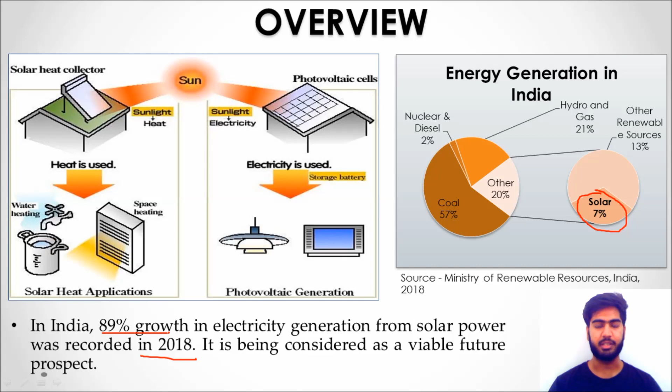Now, if we talk about India, then 7% of the total energy generation in India is from solar radiation. And in 2018, 89% growth has been seen in this sector. So this is a promising sign. Now let's talk more about the methods that are available. So in PV cells, basically the sunlight falls on the flat surface and with the help of semiconductors and transistors

is directly converted into electricity. Now the second method is solar thermal technology, in which with the help of mirrors the radiation from the sun is concentrated onto a pipe in which fluid is flowing. So that fluid is heated and stored in a storage system, and then it is used for running a turbine to generate electricity. Now this PV cell has only 20% capturing efficiency and 45% conversion efficiency,

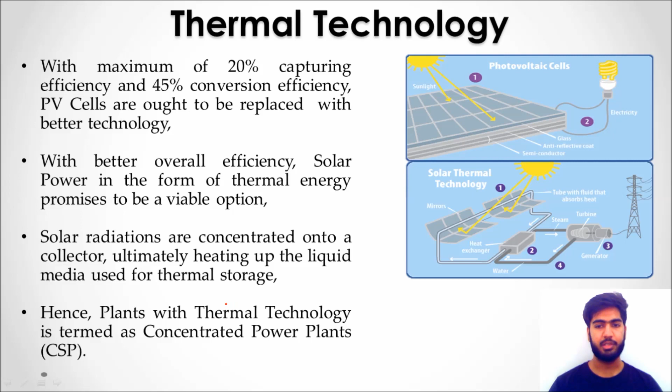which is very low to use in power plants. Therefore, solar thermal technology is used, and also the major factor is that PV cells don't work at night, whereas solar thermal technology stores the heat. Therefore, it can be used to generate electricity at night. Also, as the radiation is concentrated onto the fluid, the plants which use solar thermal technology are also known as concentrated power plants.

Now, in most of the power plants that use solar power, there are two general methods of concentrating the solar radiation. The first one is the parabolic method, in which mirrors are shaped in the form of a parabola, and the pipe which contains fluid is placed at the center of this parabola. Therefore, the radiation is concentrated onto this pipe and the fluid is heated.

Whereas the second method is the power tower method, in which flat surface mirrors are placed around the tower in such a way that they concentrate the solar radiation onto the top of this tower in which fluid is stored. As flat surface mirrors are cheap, this method is cheaper than the parabolic method, but the parabolic method provides an efficient way of heating. Therefore this method is used.

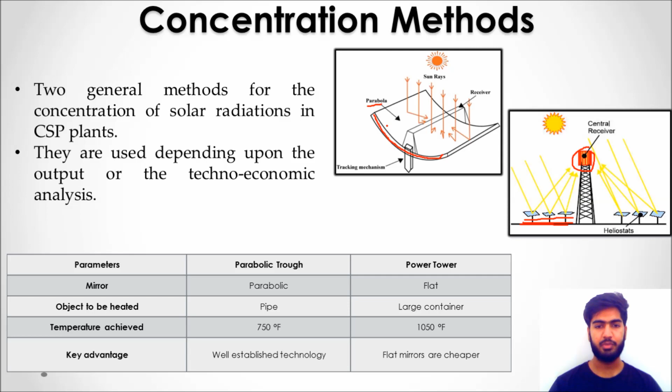So after the fluid has been heated, it has to be stored, and there are three ways to store the heat. The first method is thermochemical energy, in which the collected heat is used to start an endothermic reaction, and that heat is stored as chemical potential. Now, whenever heat is required at night or whenever there is a power shortage, exothermic reactions are started and heat can be recovered by that.

Now, the second method is the latent heat method, in which phase changing materials are used and they absorb the collected heat when they change their phase. Whenever heat is required, it can be recovered from these materials. Now, the third and most used method is the sensible heat method, in which materials are heated and their sensible heat energy is increased. So whenever extra energy is required, this heat can be recovered from them.

This method is really cost effective, and the materials that are used in the latent heat and thermochemical methods are really toxic and flammable. Therefore, it is better and safer to use the sensible heat method.

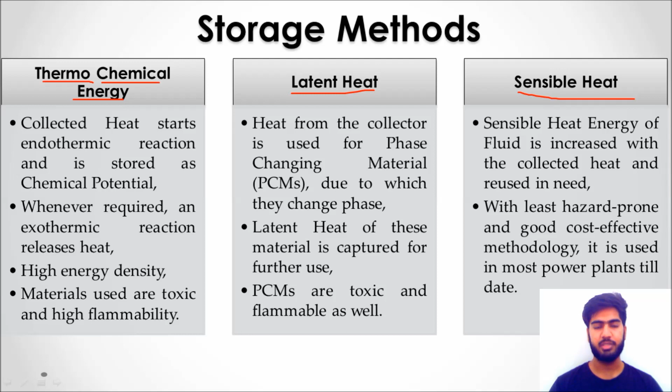As we have seen the methods to concentrate the radiations, now there are two systems generally used in power plants to store this thermal energy. So the first one is single tank storage method, and the second one is two tank storage method. So the single tank storage method uses a single tank to store hot and cold fluid both, whereas the two tank storage method stores hot fluid and cold fluid separately.

As clear from the mechanism itself, the single storage method uses less heat transfer fluid as well as is cost effective, as there is only one tank stored and it is simple in its mechanism. Two tank storage method was used extensively in the last decade, whereas now the single tank storage method has been given emphasis and is being analyzed extensively.

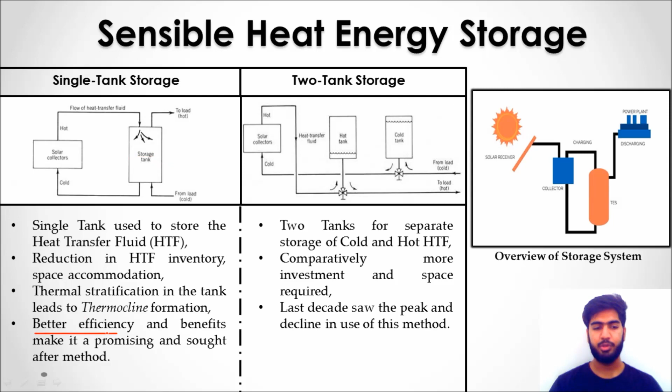Also, due to the storage of hot and cold fluid in the same tank, there is a thermal stratification that is formed in between them, and it is also known as thermocline. Also, due to its better efficiency, it is a most sought after method in power plants. Now, let's talk more about the single tank method.

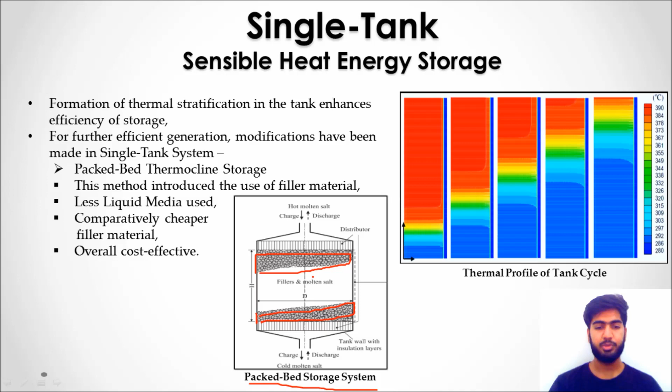Now due to this method, there has been decrease in the heat transfer fluid as well as the ability to store heat for a longer time has been seen. So this has been a cost effective method. Now let's talk about the parameters that affect the single tank storage efficiency.

So according to various modeling and analysis, the first parameter that has significant effect on the efficiency of single tank storage method is the tank dimensions. So various research has led to this theory that with increase in the height of this tank, the overall efficiency of the system will increase. Whereas an indirect relation between the diameter and the efficiency suggests that when diameter is increased, the filtration rate is reduced, which ultimately leads to increase in the efficiency of the system.

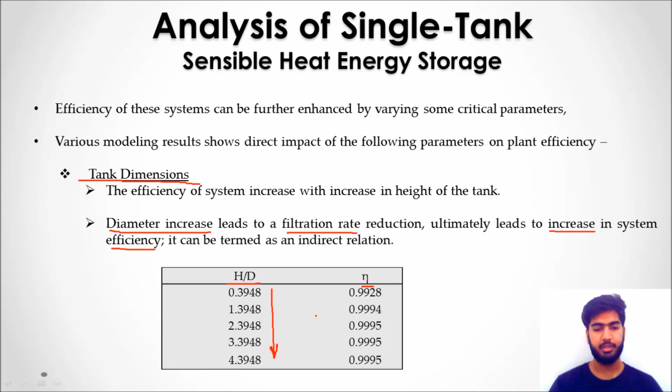Now this table shows the effect of height to diameter ratio on the efficiency of the system. It's clear from this table that when the height increases with respect to the diameter, the efficiency also increases. The second parameter would be filler materials.

As we have talked in the packed bed storage method, filler materials play a significant role in the increase in efficiency of the system. As the filler material decreases the volume of HTF in the system, it directly impacts the efficiency of the system. So there have been various modelings of power plants to find a suitable filler material so that the efficiency of the system can be increased.

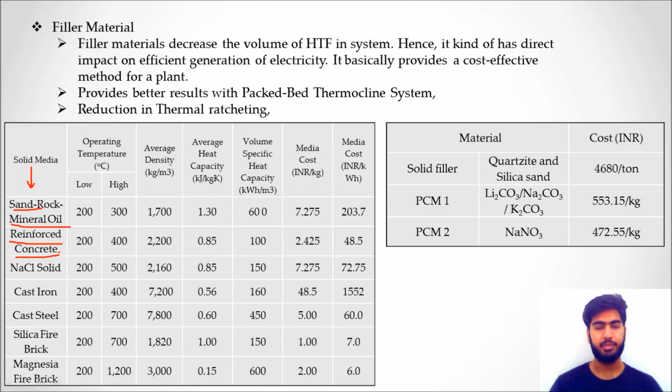This table shows the potential materials that can be used as filler materials in power plants. In most of the power plants, sand rock, mineral oil and reinforced concrete are used as filler materials as they are most compatible with the heat transfer fluids. Also, phase changing materials have been seen as potential filler materials, so various analyses on that have also been done.

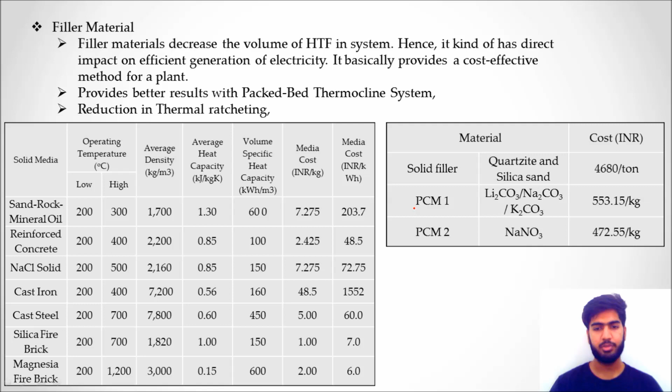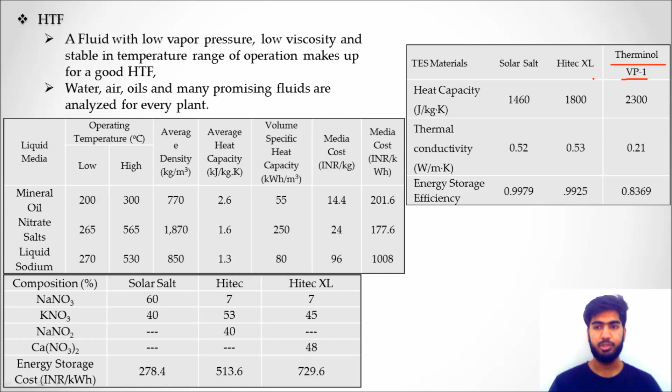Now among the nitrate salts, the salt which is most promising is the solar salt, which when compared to heat transfer fluids shows really low cost of energy storage. Also when compared to the heat transfer fluid used by space agencies, solar salt shows a greater efficiency in heat storage method.

So for the same energy storage capacity, the two tank system needs more heat transfer fluid as compared to the packed bed thermocline and the single tank thermocline method. Hence the overall cost that one has to bear on the two tank system as compared to the single tank packed bed system is really high. Therefore, packed bed thermocline system is used in most of the power plants.

For making the thermocline system more cost effective, phase changing materials have been introduced to be used as filler materials. But there is a threshold up to which these phase changing materials can be used, as if we use too much of phase changing materials, the thermal energy storage cost increases.

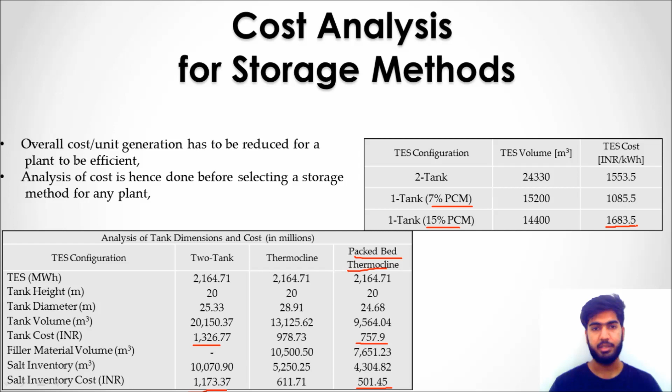Now, as any system can't be perfect, there have been some modifications in the thermocline energy system as well. So we'll talk about them. The first one is thermocline control. This method introduced a way to control the thermocline degradation in a single tank energy storage system and hence make it more efficient. Now the second advice has been to develop software that is used in the modeling of power plants to make it more efficient by analyzing the parameters and comparing the materials that are used in power plants.

And the latest introduction has been of auxiliaries and enhancers. So there have been various modifications in the working of energy storage method. It was advised to alter the Rankine cycle that is used in power plants and also to extend the contact area of the pipe that contains the fluid which is heated by the mirrors.

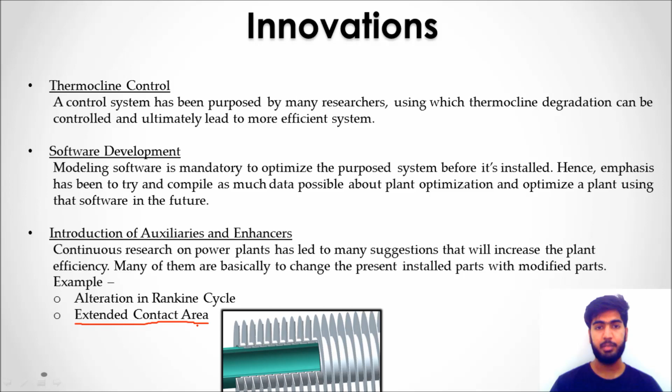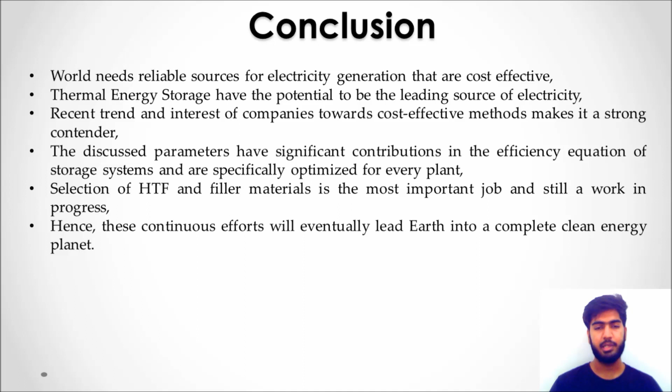So basically I talked about the methods that are used for solar energy storage and the parameters that affect the storage efficiency. As solar power is the promising candidate to provide cost-effective electricity generation, we need to store this energy efficiently and reduce our electricity generation from fossil fuels, which will lead us to being complete clean energy consumers. That's all from my side.